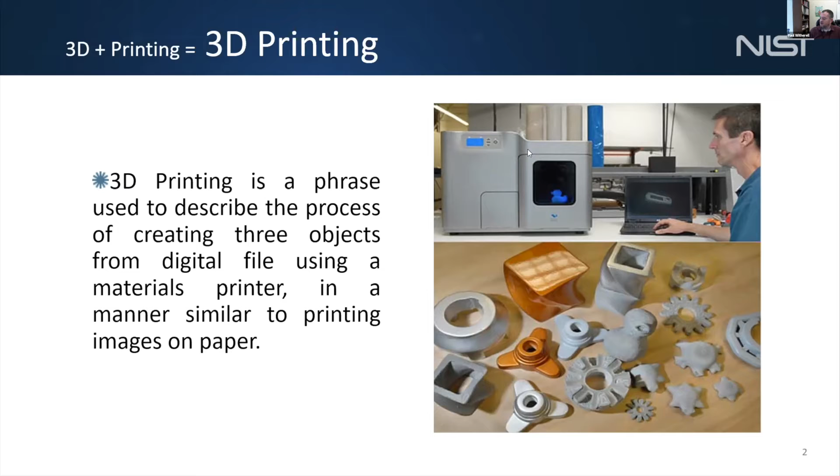So I think we've covered this far already today. Additive manufacturing and 3D printing are terms often used synonymously, referring to the same thing. I picked this slide and definition because it's a nice starting point: 3D printing is simply adding the third dimension to printing. It's a phrase used to describe the process of creating three-dimensional objects from a digital file using a materials printer, in a manner similar to printing images on paper, but with a third dimension. What you see there might be a typical at-home 3D printer in a little box, creating a polymer or plastic part. That's really the basics.

In additive manufacturing—and on the next slide we'll talk about some of the different terms used to describe these types of processes—this is maybe a more formal way of referring to 3D printing: additive manufacturing is a process of joining materials to make objects from 3D model data, usually layer upon layer, as opposed to subtractive manufacturing methodologies.

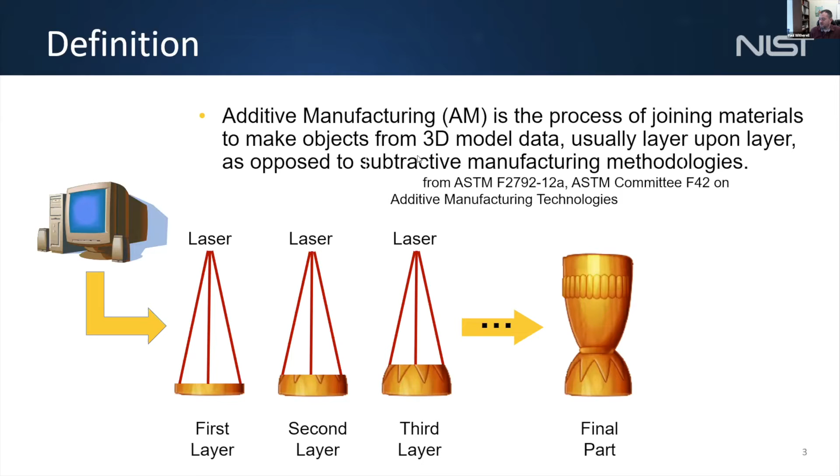Some people like to differentiate 3D printing from additive manufacturing, in the sense that additive manufacturing is more of a production process used by manufacturers to create parts for people, whereas 3D printing is often thought of as the more informal type of process. In reality, there are a lot of different names to refer to this idea of creating or manufacturing an object layer by layer. Some names people will hear are 3D printing, layered manufacturing, freeform fabrication, direct part manufacturing, rapid prototyping. These are all different iterations of the language used over the years to describe creating a part three-dimensionally using two-dimensional layers, sometimes called 2.5D.

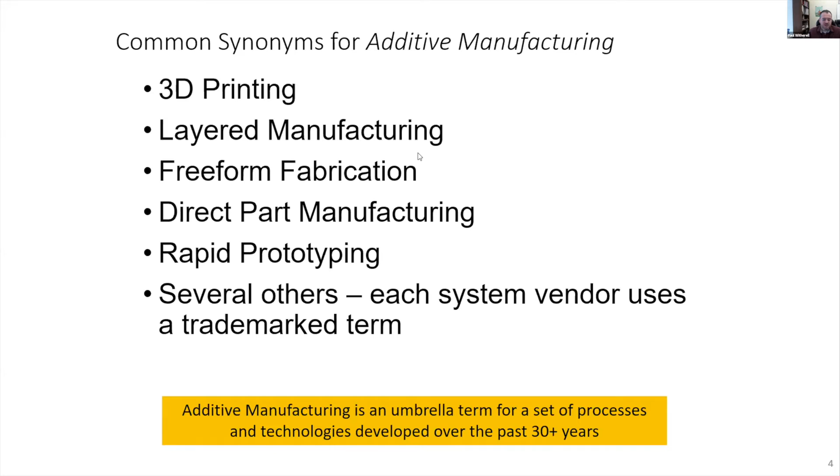The point here is additive manufacturing is an umbrella term used for a set of processes and technologies developed over the past 30-plus years. In the previous slide, the additive manufacturing definition came from a standards organization, ASTM F42 ISO TC 261. That's a standards organization I work with, and I'll talk more about it later—that's where we get some of the formalizations for what's going on with additive manufacturing and 3D printing.

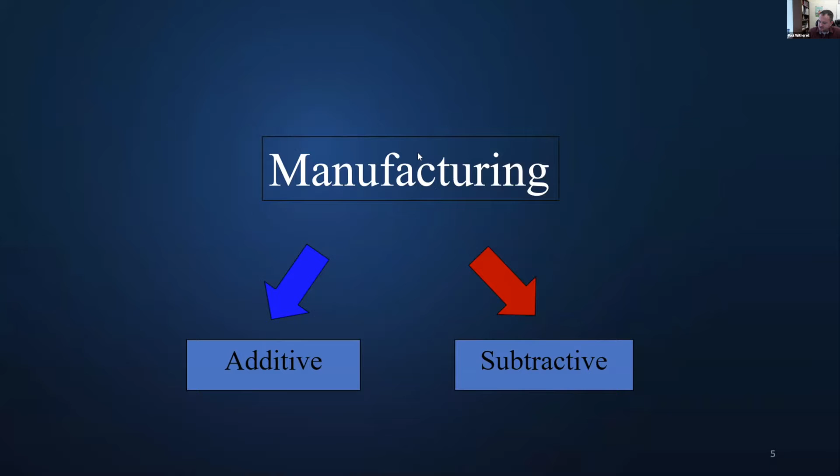In the gist of it, what makes additive manufacturing and 3D printing special compared to what's been done for a long time is very simplistic. In the next couple of slides, if you want to oversimplify manufacturing—there are a lot of different ways to differentiate additive from subtractive—consider this: if you wanted to make a sphere, a globe, the really old way is you might take a block and manually take out and remove a lot of material until you get the shape you want.

If you think of whittling something, if you're familiar with that term - the more modern way, what we see a lot with manufacturing of large metal components, is generating a 3D model, generating a CNC program, and then machining away the unwanted material. A lot of these components developed in additive manufacturing, particularly in metals, in the past have been done with subtractive machining, where you start with a block of material and remove the unwanted material until you get to the shape that you want.

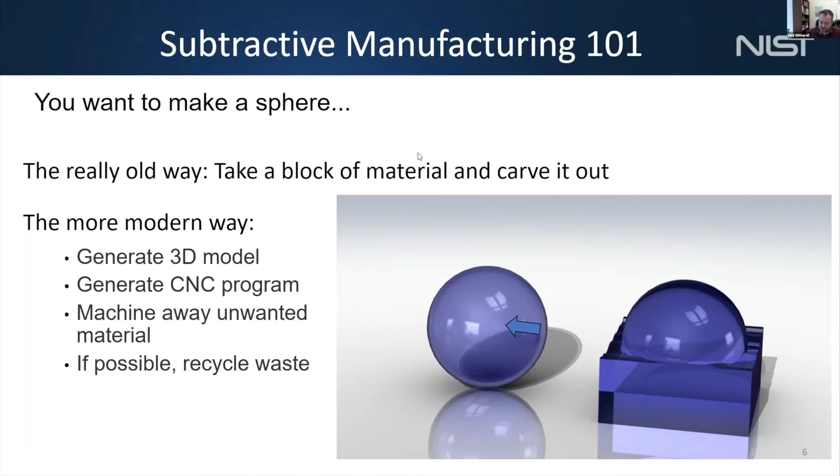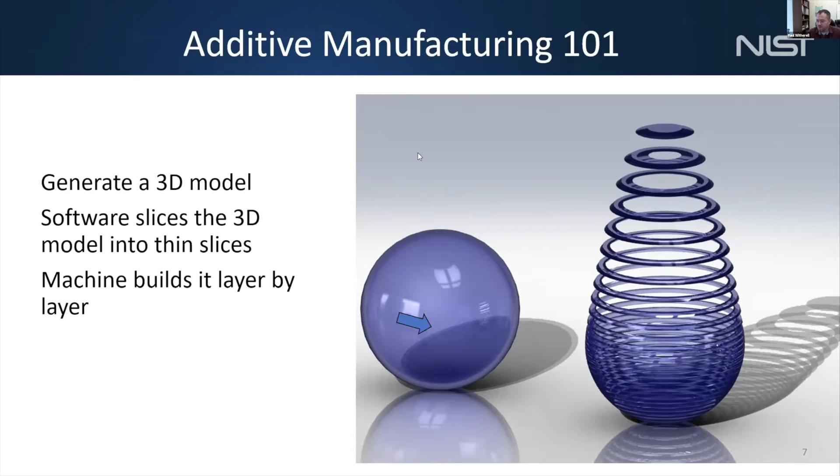As I think we know by now, additive manufacturing is different in that we generate the 3D model still, but we use software to slice the three-dimensional model into two-dimensional slices, and then we build each of those slices layer by layer. That's in essence what we're referring to when we talk about 3D printing. There's actually a lot of different ways that building can be done.

Key advantages of additive manufacturing: we can do some very complex geometries that we can't do using other processes. We can create internal passageways. We can create shell volumes that maybe you can't create using other processes. You can engineer porosity - the idea of creating cavities within full parts to perhaps do lightweighting.

Lattice structure is something that's often used in additive manufacturing, particularly when it comes to manufacturing components and developing real parts. That's the idea of creating these trusses like you see in this image, and this image. We call those lattice structures, and here's what we call a unit cell. So what you do is take this geometry and fill it in between here.

You're taking advantage of solid mechanics, taking advantage of truss structures and how they dissipate loads, and removing the unnecessary material. So what you're doing is removing material but still able to maintain most of the stiffness and really maintain a lot of the stress strain curves that you'll see from manufacturing.

Functionally graded materials - this is something that's still being explored and still being introduced. They haven't seen a lot of that in production being developed in industry at this point, but that's the idea: we can start with one type of metal and finish with another type of metal, or start with one type of volume and finish with another. One of the things we could do perhaps with the lattice is transition from a lattice to a different size lattice, and that's what we might call a functionally graded material.

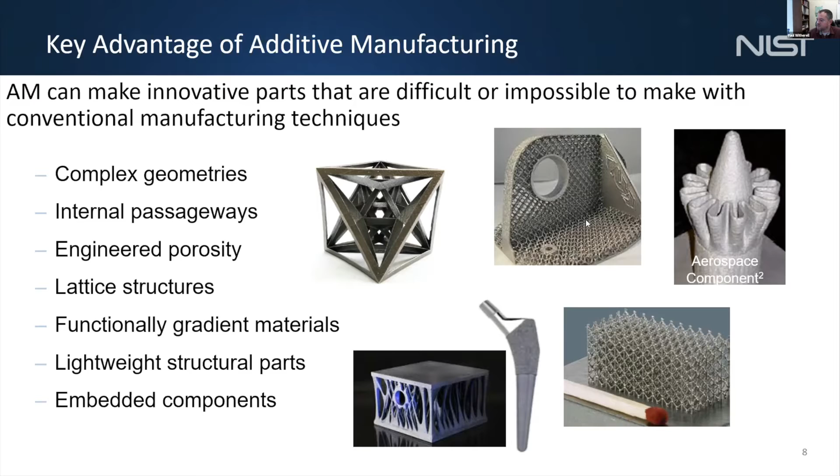So I'll talk a little bit about some of the methods that are used in additive manufacturing.

Additive manufacturing materials and processes. We've heard a little bit on the bio side of things and a little bit of the applications. Some of the methods - it's actually a broad term, as I mentioned up front, and it's increasingly becoming a broader term. Polymers, ceramics, metals, composites, papers, even cements are becoming more common, where we see additive manufacturing and 3D printing of buildings.

A variety of material forms: filaments, resins, powders, sheets, rods, and as I mentioned with cement, slurries. We're seeing more the idea of using a filament and embedding fibers into filaments, delivering either a metal or a composite type structure using a plastic or polymer, melting away the plastic or using the plastic as a binder. Each of these different materials and forms can be differentiated yet again with the types of processes that are available.

There are 7 types of processes, and within those, many different individual processes. Next we'll talk about the types of processes, but each will have different approaches. Some support different types of materials, different capabilities, and different purposes overall.

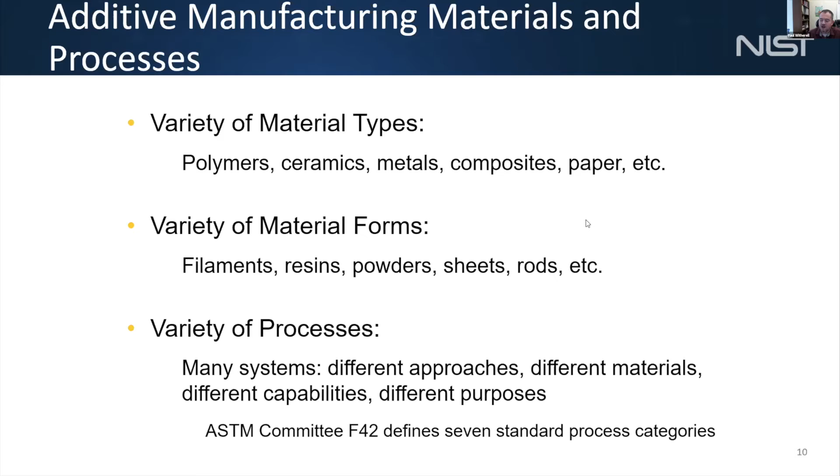I mentioned the standards committee, ASTM F42 and TC 261. One of the things we do in the standards committee is look to describe these types of processes and come to a common understanding of what additive manufacturing and these processes are. One of the things they did in F42 early on, in the past 15 years, was establish the types of processes included in additive manufacturing.

Material jetting, binder jetting, directed energy deposition, material extrusion, vat photopolymerization, sheet lamination, and powder bed fusion. And within each of these types of processes, you can actually have individual processes.

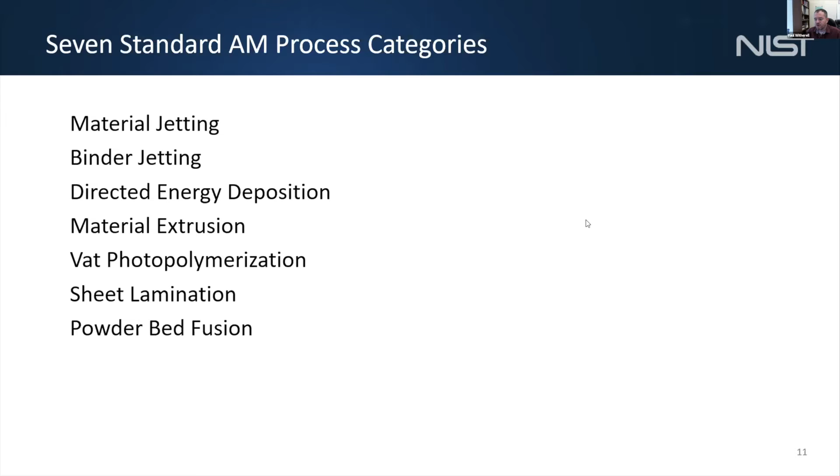For powder bed fusion, sometimes you might use a laser, sometimes an electron beam, sometimes on metal, sometimes on polymers. For vat photopolymerization, sometimes you might use a laser, sometimes a UV light ray, sometimes as a scan path, sometimes as a mask. So there are different ways of approaching these types of processes, different ways of creating the geometry.

I'm going to start with the bottom four to give you a flavor. This is where most people are familiar with additive manufacturing or 3D printing: material extrusion, often referred to as fused deposition modeling, in the context of what's done in the MakerBot. That was one of the early rapid prototyping tools, part of the Maker movement - the MakerBot was a big part of that just 5 or 6 years ago.

The idea is that it works like a glue gun, where you draw a filament and push it through a heated nozzle, then move that nozzle around within your two-dimensional area. Once you finish carving out your layer, your two-dimensional area, you move the base, and then repeat that process.

With material extrusion, sometimes you can do multi-materials - one material gives you the actual structure, and one material is used as a temporary structure that you can even wash away now with a polymer. You can also do material extrusion with carbon fibers, and with metal as well. As we advance in additive manufacturing, I'll talk more about the science in the second half - we're able to improve our processes, but also improve our capabilities.

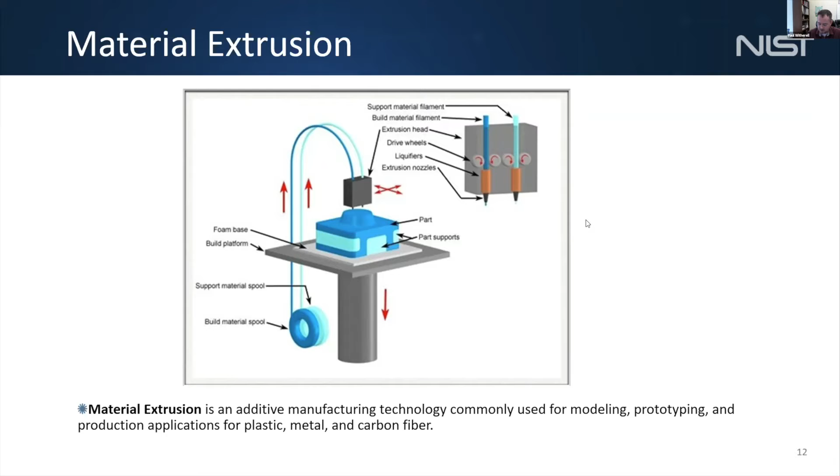Because this type uses a liquid, you'll get a bit better resolution than with something like an FDM printer or a material extrusion printer, though those printers are giving better and better resolution too. So a lot of times if you've run into something in a museum that says they 3D printed this, or you see some small shape that you realize has been 3D printed, a lot of those times it's been with vat photopolymerization. These are fairly affordable technologies or processes that give you a bit better resolution.

The material extrusion process I showed in the previous slide, that's probably what you mostly see when you talk about the maker movement and the idea of being able to 3D print at home. More often than not, those machines are used to 3D print at home, and entry level for some of those is as low as $100 or $200 now. That might require a little bit of do-it-yourself, but for a fully operational one that's commercially available, you might get one for as low as $400 or $500. So the price entry point has really come down over the years to get into additive manufacturing and 3D printing. These are two of the most common processes where people really start to learn and get engaged with the technology.

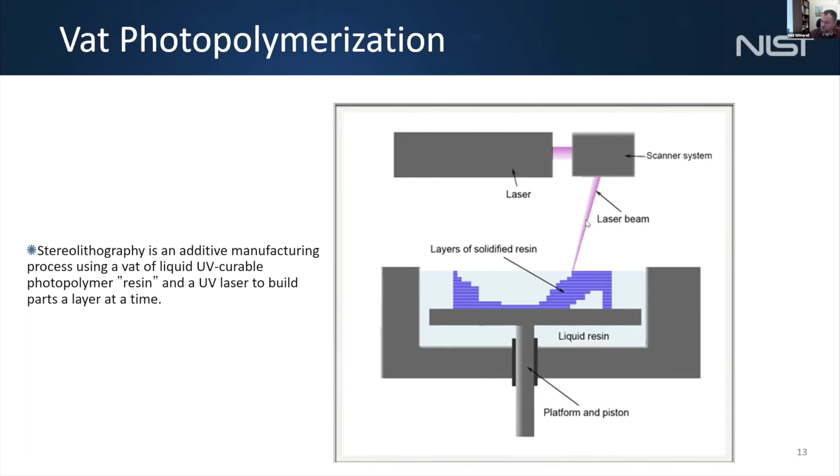Sheet lamination is a little bit different, and I want to introduce this one to give a different flavor. In sheet lamination, which is still a type of additive manufacturing, you're not moving a laser or moving filament as you draw a path. What you're doing is literally laying material down layer by layer with a sheet material, and then carving it out. You could use a laser to carve it out, but instead of depositing material, you're depositing the whole layer at once and then carving around it. So that's different - you're using the raw material process created by the sheet, and some sort of binder between the sheets to create the three-dimensional part. Whether it's adhesive coated paper, or increasingly some sort of friction welding between the sheets to bind them together, it depends on the materials involved. But that's a different flavor of the additive manufacturing processes.

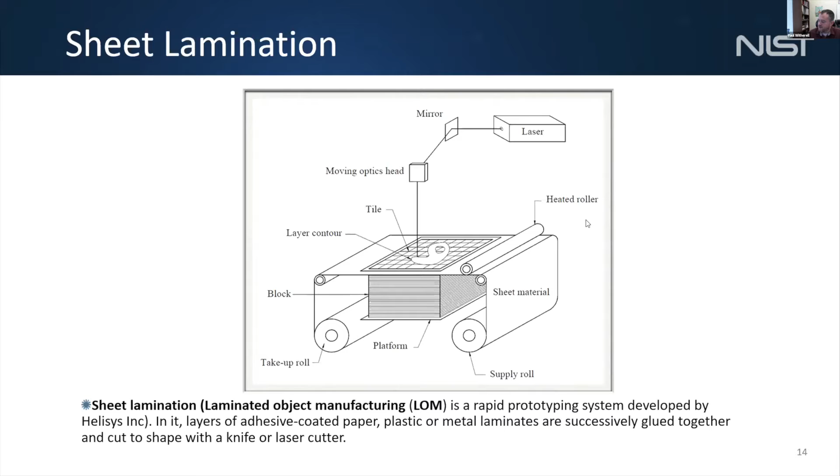And finally I want to talk about powder bed fusion. Coming from NIST, this is where I spend a lot of my time and where a lot of our work is done. I'll tell you as I move into applications what powder bed fusion really offers. But powder bed fusion is either going to be done with an electron beam or a laser. I'm most familiar with those done by laser, where the melting is done by a laser, and it can be with a polymer or a metal, and even ceramics are being explored right now.

With the polymer, what you're doing is sintering the plastic bead, which starts to create a binder, so you form your part based on the material. When you're using a metal, you're not sintering - you're fully melting the metal powder. So when we talk about powder bed fusion in additive manufacturing, particularly from my background, we bring the metal powder to a full melt, and by fully melting the metal powder with a melt pool, we're able to do the layer by layer process and create fully dense materials.

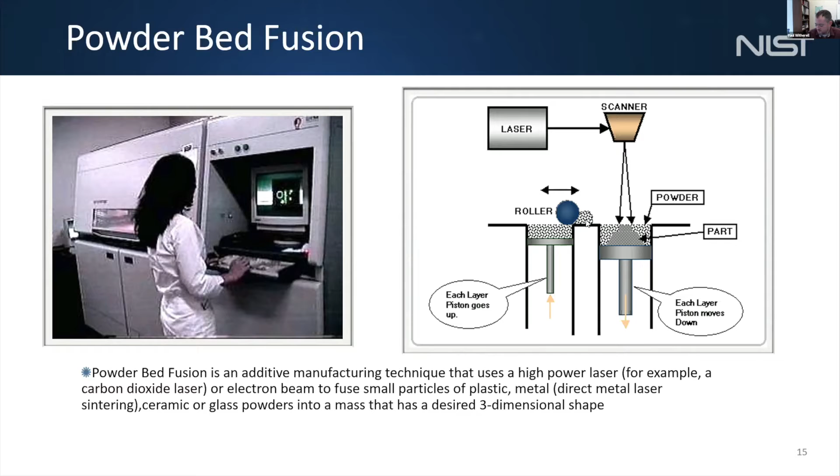So what are the projected impacts of additive manufacturing? Again, this goes somewhat into our everyday life, but very much into what we're able to do with industry and in the manufacturing industry.

Rapid product transformation - this idea of print to part is not really there yet, but art to part is something we're seeing very much of. I'll talk about the applications in the next few slides, but the idea that you can create one-offs without a lot of preparation, without having to design a new manufacturing process for it, but by simply creating a computer-generated model, you're able to create a geometry without a lot of intermediate steps.

When we're using something like a filament, and even more some of these metals processes, we're able to create geometries by really simplifying the processes that may have been used in the past.

Improved performance with reduced weight. We've talked a little bit about that with the lattice structure, the idea that we can take advantage of material characteristics, use unit cells within a part volume, and start to remove material while still maintaining an effective stiffness.

The cost-effective personalized production. For those of you who have been involved in industry for some time, or exposed to different types of industry, from mass production to more of the mass customization type thing, you can personalize things with additive manufacturing. I'll talk about that in the next couple slides when we look at the applications.

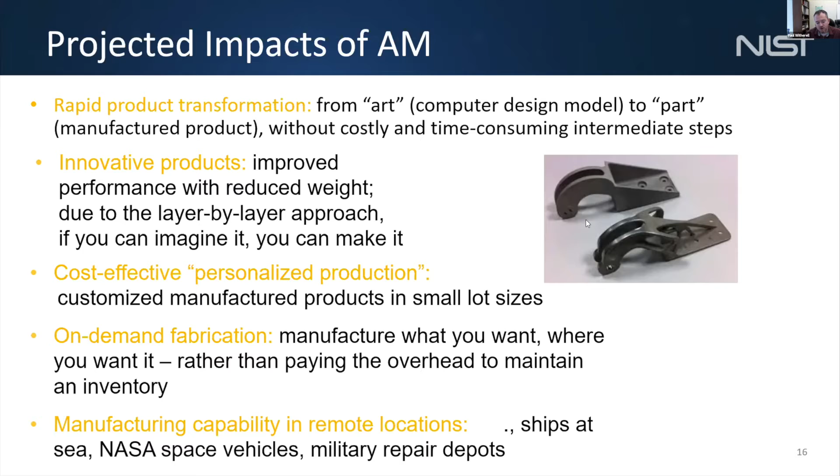And bringing manufacturing capabilities to remote locations. This is something particularly being explored by agencies like NASA and the military—the idea of not having to bring all your spare parts with you, but having the capability to recreate spare parts when you need them.

So now I'll talk a little bit about some of the applications in additive manufacturing. How is 3D printing changing the world? Medical, advances in research, prototyping, preservation, engineering, architectural engineering, advanced manufacturing, food industries, automotive, accessories. This just shows there are a lot of different places that additive manufacturing is touching. Now I'm going to go into a little bit more concrete examples of some of these.

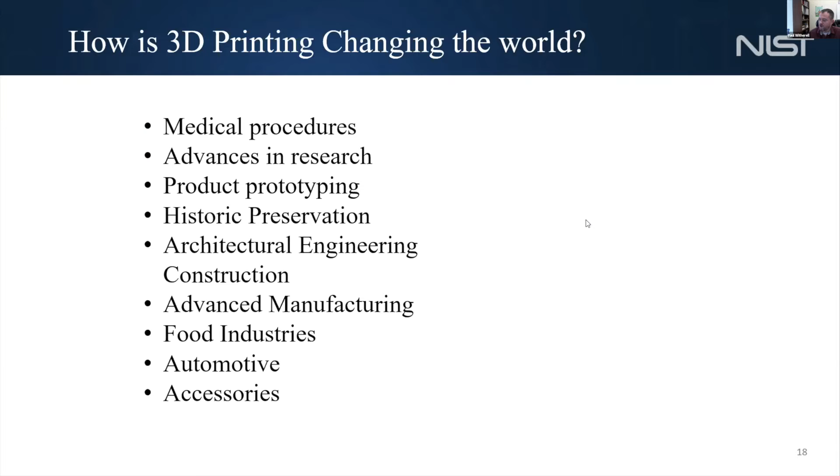I just decided to label this trinkets—a lot of stuff you might see made at home. Before COVID, when we would travel places and go somewhere with a gift shop, more and more, say you go to someplace like Paris, they'll actually sell Eiffel Towers that have been 3D printed. So you're starting to see people make these trinkets and physical objects more available to the general public.

Some little bird decorations, little action figures. Even as simple as customizing your phone case is a fairly common application.

They actually have data repositories called Thingiverse or GrabCAD, places where you can go online and grab designs that other people have done and use them yourself. There's a lot of sharing allowed by 3D printing—on Thingiverse I've printed a statue of a runner, and I'm able to customize it, maybe put it on a little platform, and create it myself at home. So this is where you might very much run into the 3D printing side of things in the everyday world.

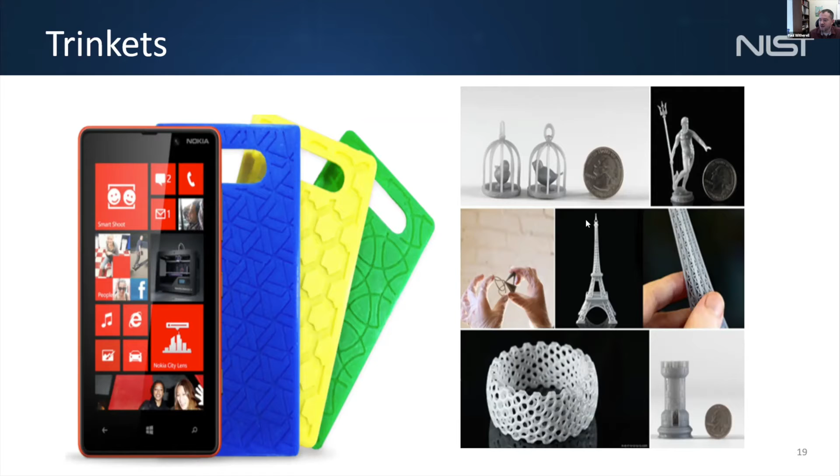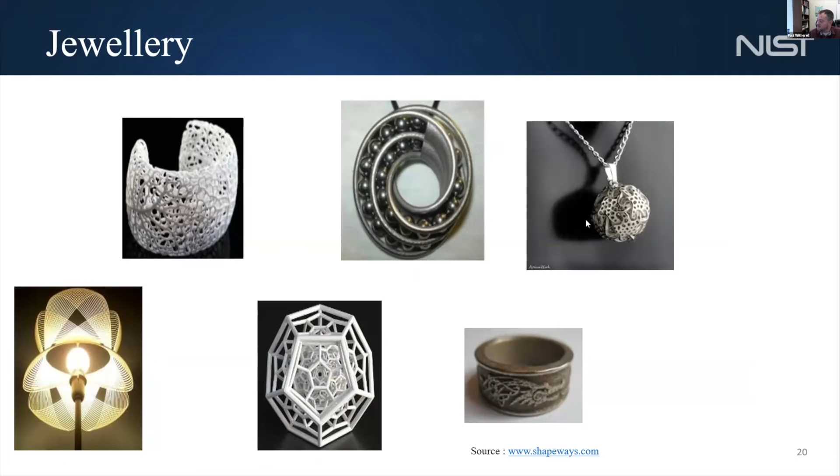Jewelry is another one that people are trying to take advantage of a little more, particularly with fancy jewelry, not just costume jewelry, but jewelry that's artistic. The idea of designing something that can only be created in certain ways is something you're starting to see more and more of in jewelry stores.

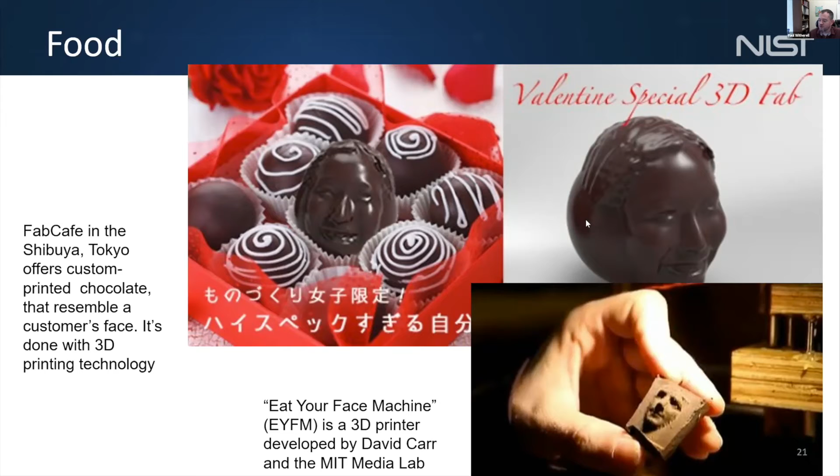Food is becoming more and more common. There was an article a couple weeks ago where someone 3D printed a steak, achieving a texture that's normally very difficult to get, but they were able to do it with 3D printing. Here's a simpler example, a chocolate, where you can eat it layer by layer. These are ways you can interact with 3D printing and some of the neat, novel capabilities being created with it.

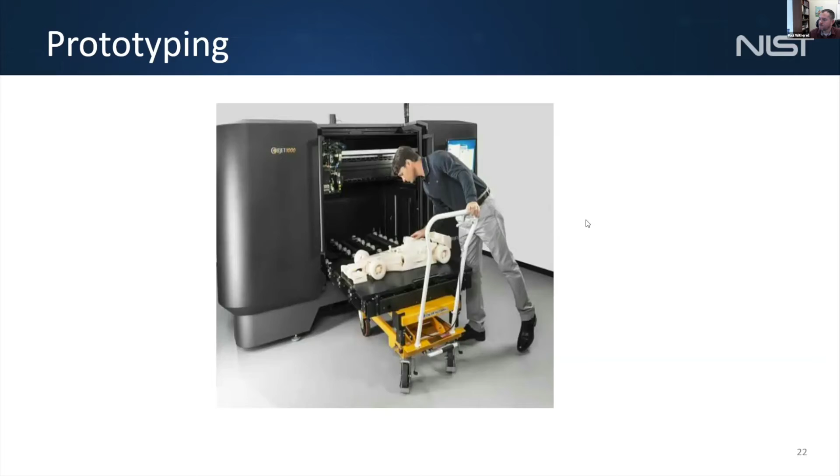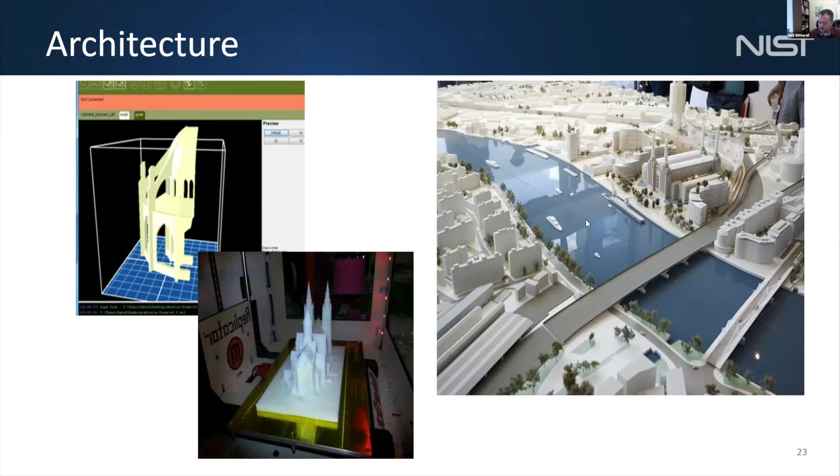We're seeing this in architecture too. We can tour homes virtually now, integrating with the 3D environment, taking virtual tours of things. But there's always still something to be said for seeing something physically. Architects have taken advantage of 3D printing technology to really realize their buildings and communities, and give people that full wow effect of what these unique designs look like when actually realized in the physical world.

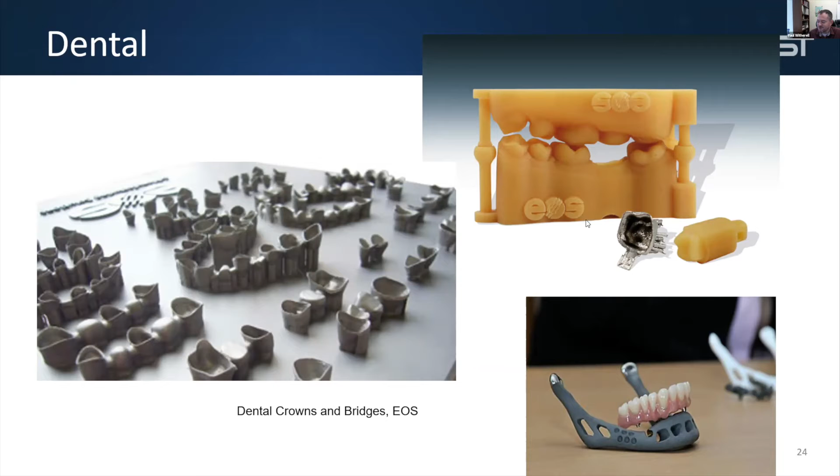Moving on from dental, bottom right has teeth but it's more of a prosthetic, or medical application. This goes to the idea of customization, being able to create parts of high quality with very specific details. You see a hip socket with that lattice structure. What's neat is that with this hip socket inserted into a patient, the lattice structure and porosity, which you wouldn't be able to create without 3D printing, actually facilitates bone growth. It improves the performance of the artificial hip socket because by exposing that porosity, it supports your bone tissue growing more naturally. Previously you'd have holes drilled into something completely solid, but by introducing this more porous structure, you actually get a higher success rate in implementation.

You see some more mechanical parts on the top right, and even hearing aids, with the idea that since every person's ears are different, why are we treating them all the same? How do you customize for a particular application and a particular person?

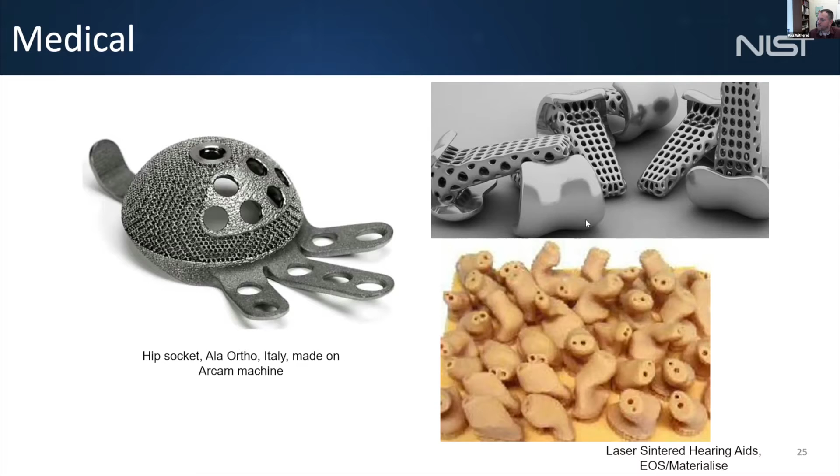Prosthetics - I mentioned I would talk about this again. We saw that jaw earlier on, the dental one, and here we're seeing the idea that every body has this particular weight balance, and so the idea of how the weight is distributed and how somebody interacts with an artificial prosthetic. Some artificial prosthetics can be very difficult to fine tune and get just right.

3D printing not only helps you iterate through those processes and find where that fit works out sooner, but it also helps you create better distributed, more advanced prosthetic technologies and parts. Here on the right is a bald eagle, and on the left you simply see a woman who got an artificial leg. Perhaps I'm not sure if her foot is 3D printed as well, but I'd imagine it is. So you're not only seeing the metal part of the leg, but the silicone that could be added, and the detail that can be added for the foot.

On the right, what you're seeing is a bald eagle, and this bald eagle is unable to survive without its full beak because it needs to eat. What 3D printing allowed, additive manufacturing allowed, was to create a fast, quick, meaningful solution that the bald eagle was able to receive - a customized beak, but also something that somebody could do on the spot. It wasn't a 2-week turnaround. It was probably a 2-day turnaround, where the beak was generated and then manufactured. This eagle was now able to eat on his own, be sent out, and live in the wild.

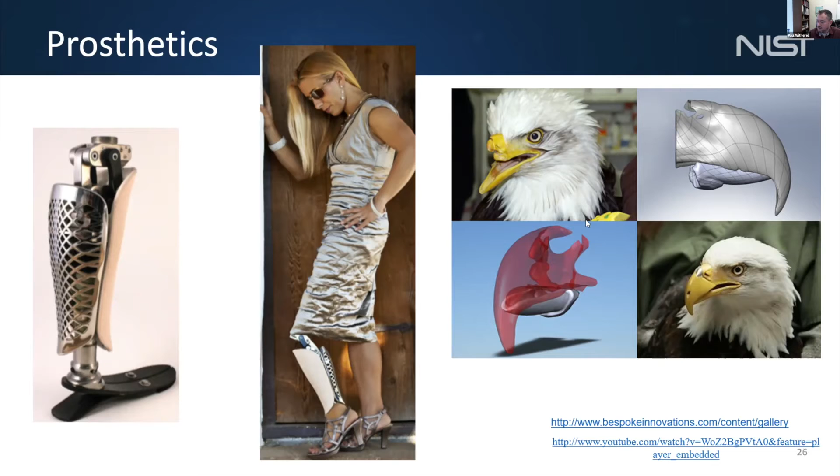And finally, for last, I saved advanced manufacturing - aerospace, automotive, and defense. This is where I'm going to live for the next few minutes, talking about what NIST does and a lot of the work we do in this area, particularly with where I'm from, in the metal side of things, in the measurement science for additive manufacturing lab. Some of the research we're doing helps the applications - the people using these applications in the aerospace, defense, and medical industries - for the advanced manufacturing of parts.

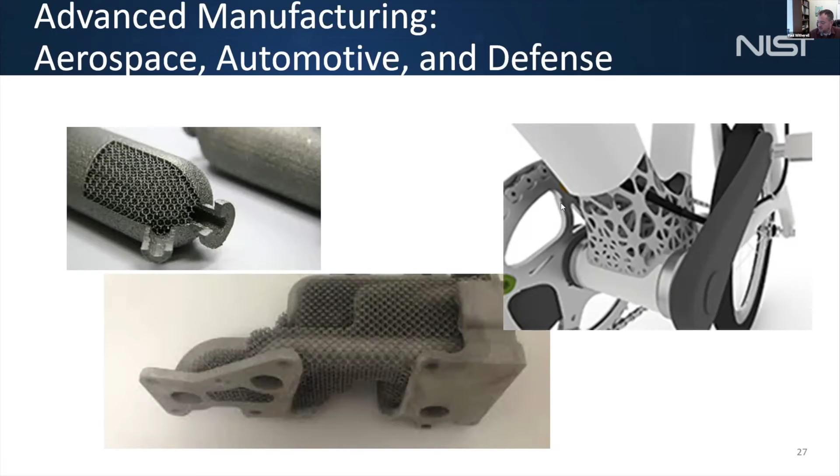So, additive manufacturing at the National Institute of Standards and Technology. NIST is a national lab under the Department of Commerce. Our mission is to support U.S. commerce through measurement science. When we talk about measurement science, we're talking about the idea that there are quantities, things that can be observed and measured. By making observations and measurements, it allows us to make better decisions and improve things. So what NIST does, what we do, is look at what can be observed, what can be measured, and how things are improved.

We actually have a very broad area of application in our research. Our main labs include the Physical Measurements Lab, which is fairly famous for operating the atomic clock - the idea that we can measure and keep track of time. We actually keep track of time for all of the US in Boulder, Colorado.

We have our Materials Measurements Lab, which has done quite a bit of work with the Materials Genome Initiative - the idea that we can break down materials into things that can be designed. We have our Communications Technology Lab, which played a large role in the transition from 4G to 5G for cell phones, and understanding the wireless spectrums and the implications of changing those frequencies.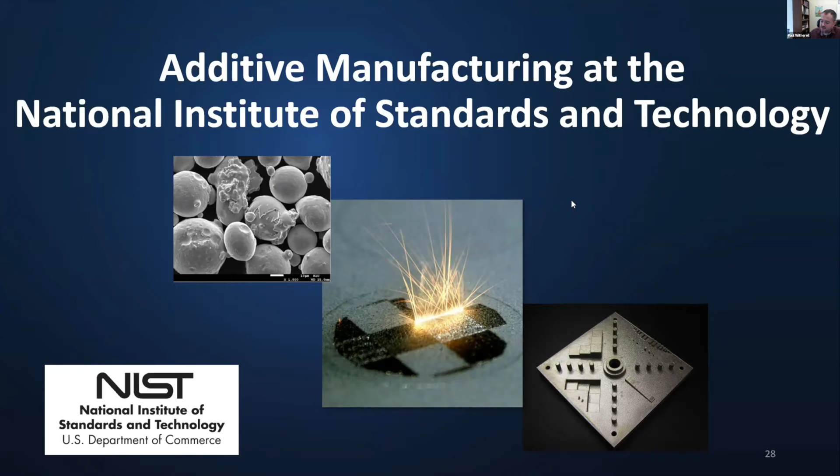Additive manufacturing at NIST is not specific to the engineering lab. We actually have it across labs, with collaborations across labs. I'm going to tell you a little bit about the polymer work done in the materials lab, and then the work we do in our measurement science for additive manufacturing program.

NIST and additive manufacturing is really a cross-lab effort. We develop the measurement science, and manufacturers and technology providers use NIST test methods, measurement tools, performance measures, and scientific data every day. We're very involved in standards development.

One of the things we do outside of measurement science is use that measurement science to come to basic understandings. I mentioned the atomic clock, but more recently we've been working on the redefinition of the kilogram—taking its definition from an actual physical quantity to something that can be reproduced using atoms and moles. NIST played a large part of that in the past couple of years.

So what are our measurement standards, our time standards? NIST really does the fundamentals that address many of those things, though not always at the fundamental science level—a lot of times we're addressing things at the applied level. That's where we see interactions with standards communities, whether it's ASTM, ASME, or the International Standards Organization, and we do a lot of standards development work and partnerships there.

Working for the Department of Commerce, we work with a lot of academic folks, a lot of government folks, and a lot of industry folks. What we really focus on is measurements and standards.

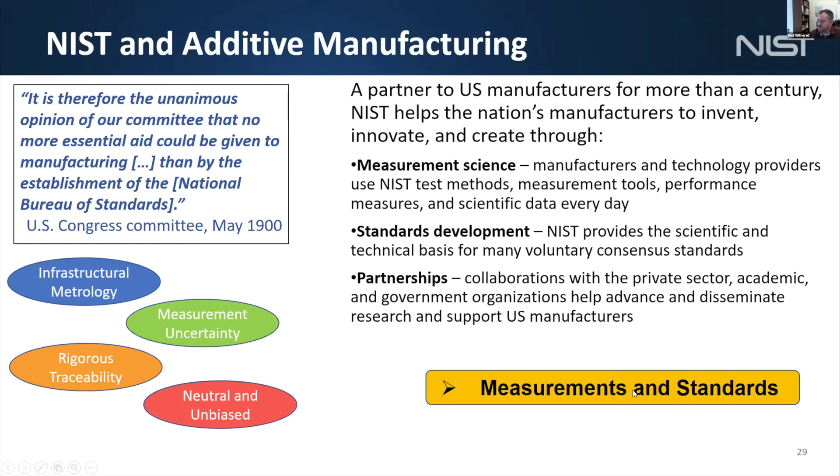So additive manufacturing with polymers—we talked a little bit about material extrusion, fused deposition modeling, and how that works. Now we'll look more into the science of how that layer-by-layer process happens. What we're seeing is a weld zone: when you deposit one layer on top of another, what is the observation we're actually making? Here you're seeing fused deposition modeling and that layer-by-layer polymer interaction.

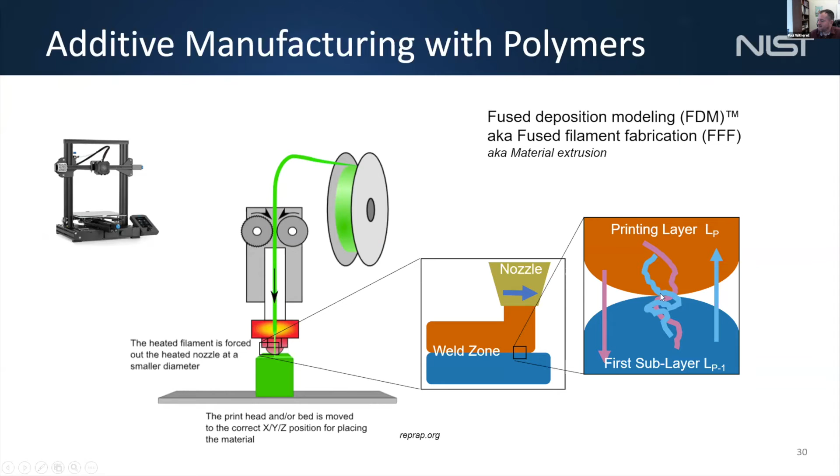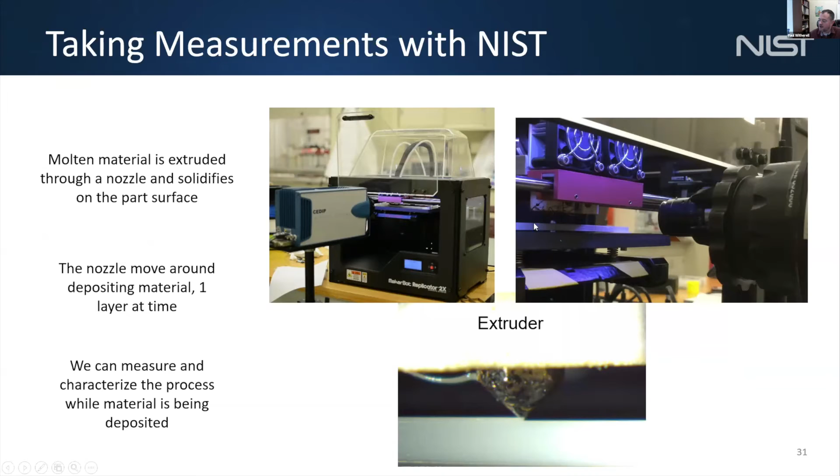Some of the work we do here at NIST, coming out of our materials measurements lab, looks at this layer-by-layer interaction by sticking a thermal camera on there to make observations about what that interaction looks like, to understand the science of what's happening. This enables us to look at the heat and temperature, analyze how the filament is being deposited, and study the interactions between layers.

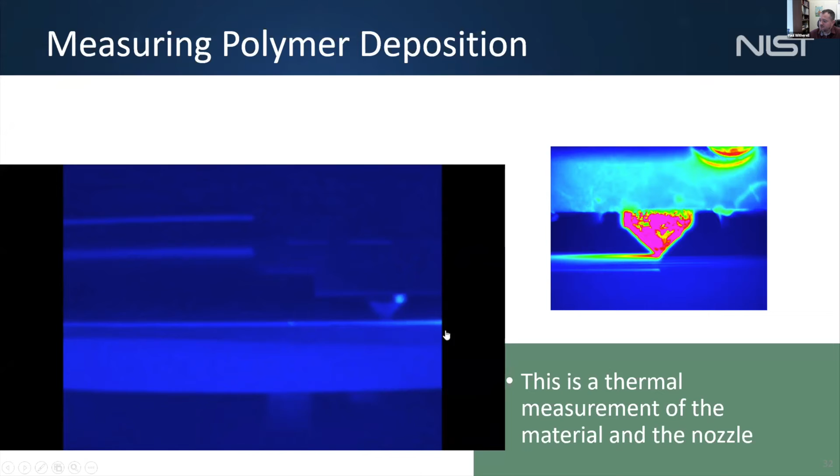Here's a snapshot, but this quick video shows thermal imaging of what's going on. You can see where it's hottest, and you can start to see the cooling patterns of the filament on a path-by-path, layer-by-layer basis. That's an example of the work our materials measurements lab has done studying polymers.

Coming from the engineering lab, our focus when we created the Measurement Science for Additive Manufacturing program was to really focus on metals additive manufacturing. That's where we've been for the past 8 years of our program, supporting U.S. industry—industries like aerospace, biomedical, dental, and automotive—that are leveraging these technologies to develop one-of-a-kind parts that couldn't be made otherwise, taking advantage of additive manufacturing for very critical applications.

Here we see a heat exchanger, a plate in the human skull, light weighting, the LEAP fuel nozzle, and a turbine blade. The idea is that additive manufacturing is being used to create parts that have been made in other ways before, but here we're seeing where it's created better, and where there was a significant part count reduction.

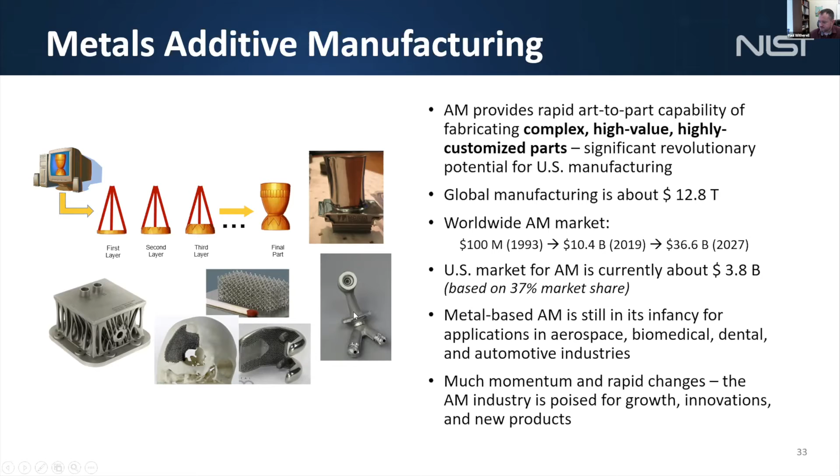We've created quite a cost savings, and here we're seeing some very unique geometry.

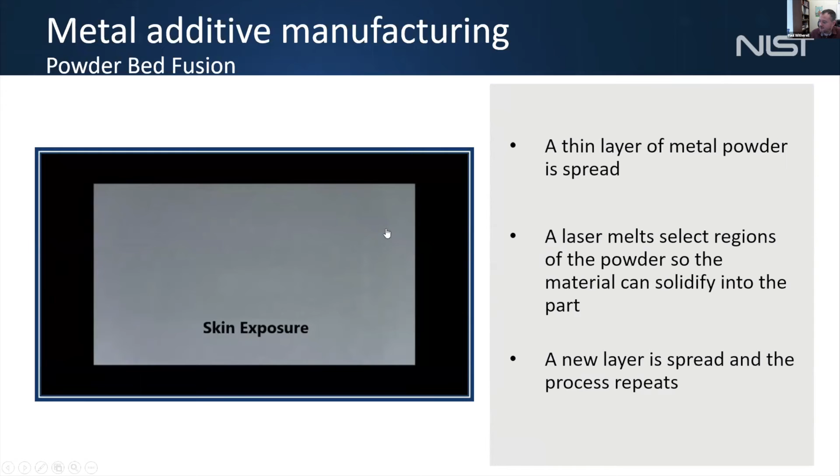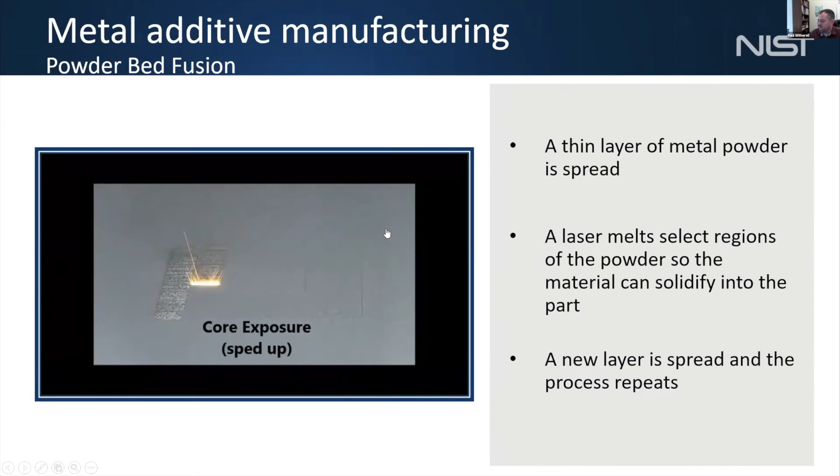I mentioned I'd show you an actual example of powder bed fusion. In our lab, we have three powder bed fusion machines for metals, all with laser, and right here we're watching the laser powder bed fusion process of metals. We also have one binder jetting machine and one directed energy deposition machine. But a lot of our work started on the powder bed fusion machine, and a lot of our work has continued there.

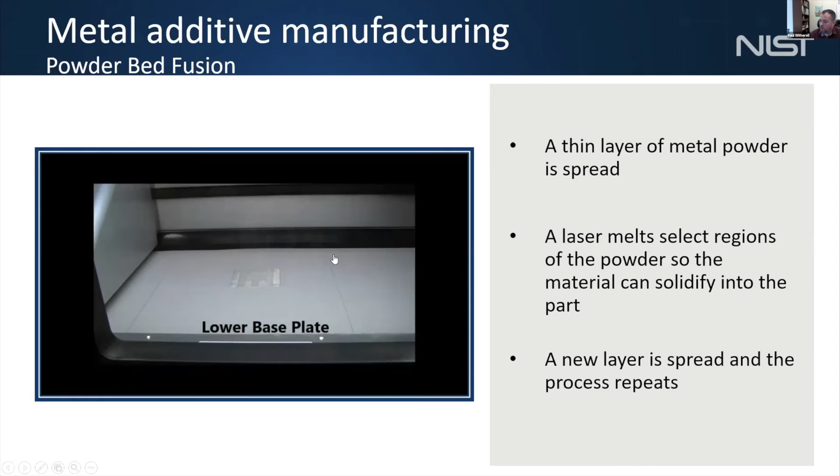So here's an example of what's actually going on in the process when we're creating something. The laser is melting it, then we see another layer of powder come across, and that process repeats.

So where does NIST come in? As I mentioned, we do measurements - we look for things we can measure so we can start to improve the process. What we found is metals additive manufacturing has been a maturing technology for almost 40 years now. I don't have the full history of additive manufacturing, but it's matured from a state where it was very sloppy to start - essentially just welding layer on layer on top of layer, to the point where you could get a rough outline of a shape or geometry, but it wasn't necessarily something you'd put in a car or an airplane.

But we are doing that now. So how do we get from something that doesn't really look like we want to something we're now putting in airplanes and cars? We're doing that by better understanding the process and its constituents, and better understanding how to evaluate the part after it's been completed and fabricated. That's where a lot of our work at NIST is focused - better understanding the raw material, characterizing and measuring it, better understanding and measuring the process, and finding new ways to measure the final part to build confidence in it. That's where most of our projects really lie.

There's actually a lot of uncertainty quantification involved. As a digital process, there's a lot of data that goes along with that as well. Dr. Lee mentioned the role of AI and machine learning techniques - a big part of how we learn from these things is we sense a lot of data, and then we analyze that data to make new observations and reach new conclusions.

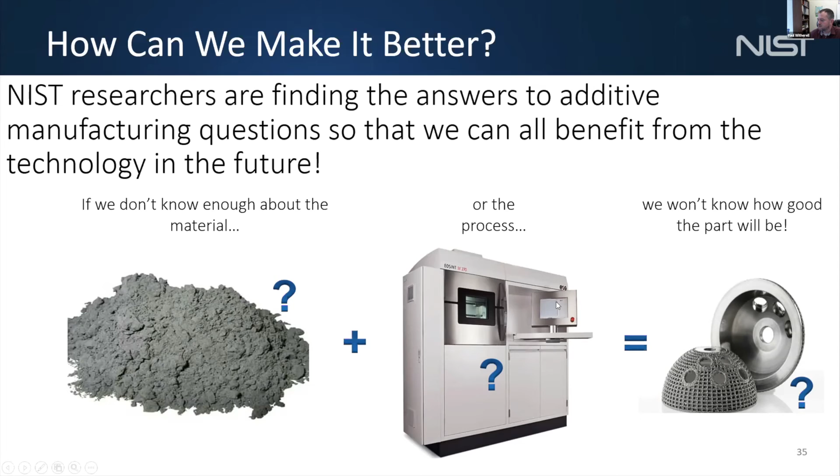So here are some of the observations we're making on the material side of things. On the left you're seeing the powder rheology, the powder flow. This helps us make observations, run simulations, and do studies of this flow, then apply it to the operating environment. We're trying to understand how to achieve a specific type of density - when using the laser to melt the powder bed, how do we distribute the powder so we get the fully dense product we want? We're able to measure the behavior of the powder, simulate it, observe and make predictions about how it will behave, and then repeat that.

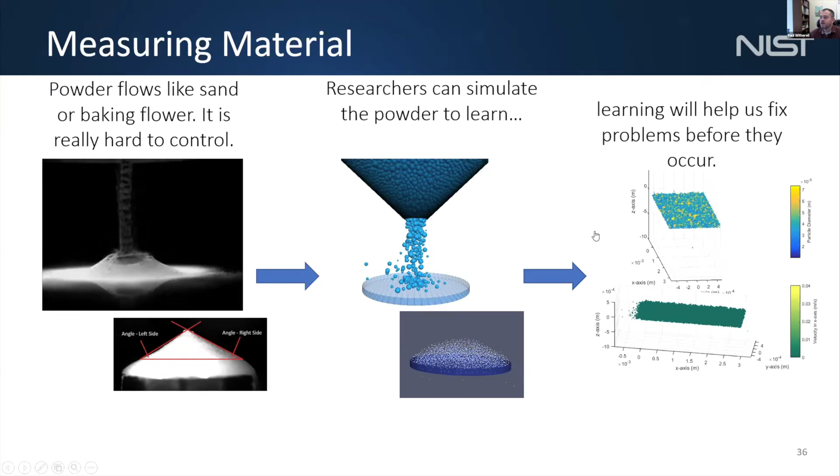Measuring the process - I mentioned that in powder bed fusion, we're using a laser going over a powder bed, solidifying a part one path at a time. This is a part fabricated in our in-house built powder bed fusion machine, which I'll show you. What you're seeing here is thermal imaging, similar to the polymer process, but this is for metals - this is a thermal imaging camera.

What it's doing right here is that's the laser tracing over this path, so this is this part being created with a laser. What you're seeing here is actually a reflection measuring the heat at the melt pools with the thermal camera.

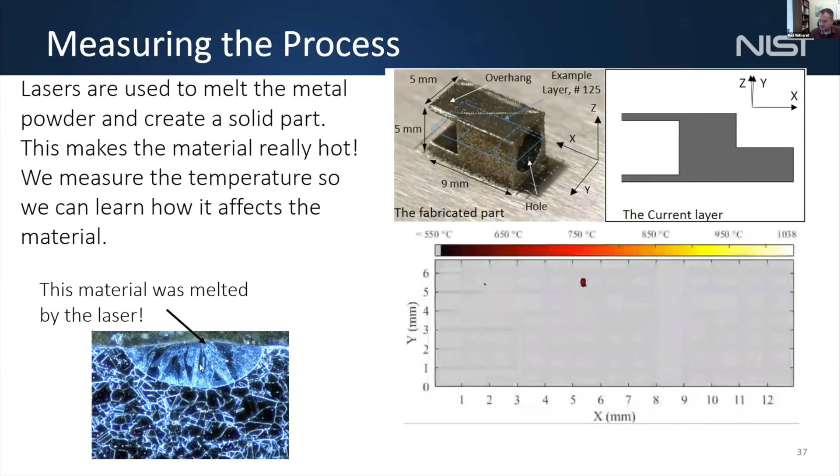You're also seeing the heat from the spattering. That spattering creates some variances in the final part quality, because that goes right back into how the powder was laid. Depending on how the laser interacts with the powder, you can create powder spattering, and that will actually change your surface finish and final part qualities. We can also look at the microstructure after the part's been melted and after it goes through different solidification phases, to see what type of microstructure forms and how it behaves, which relates to qualification.

But when we study the process, one of the things we're doing is looking at ways we can improve it. This is our in-house machine, the Additive Manufacturing Metrology Test Bed, a powder bed fusion machine that's one of a kind, built at NIST, with the key phrase being metrology test bed. It was built with the idea that we can measure, observe, and change our measurements and our measurement technology, because it's our machine.

We also have organic control over the scan strategy, which isn't normally seen in a lot of commercially available machines. Powder bed fusion is a common technology used in aerospace, medical, and defense applications. Those machines, entry level, normally cost around $600,000. Compare that to the polymer machines I mentioned earlier, which you can get for a few hundred dollars—these metal machines are very cost prohibitive.

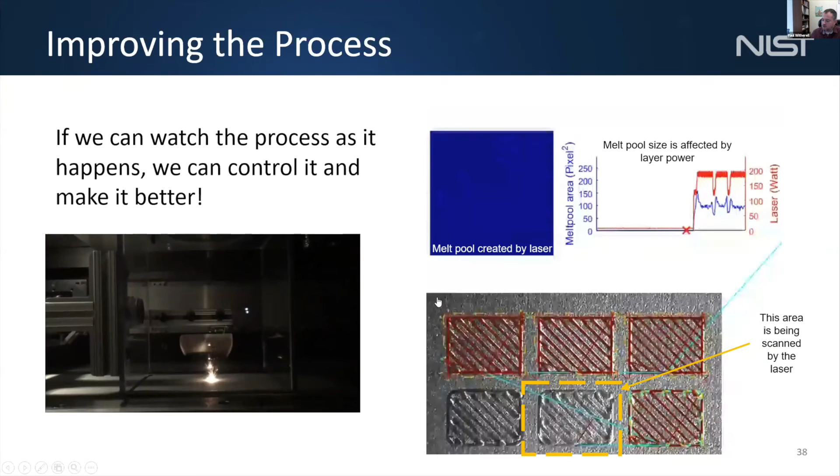When you do purchase them, it's for commercial use, and you expect good part quality out of them. Because of that, a lot of these machines work very hard to operate as they're designed, with what the manufacturer can control. But people also want to have some control themselves. So there's a natural conflict: the more the manufacturer opens up the machine, the less they can guarantee the quality of the part being created. The user ideally wants to open up part of the machine so they can have more choices and variety in how parts are developed, so it creates some conflict with these commercial machines.

By having an in-house built machine, we're able to have full control over everything going on in the machine and our entire build process. You're seeing how we're able to control the scan strategy, which is usually built into commercial machines, but in ours we have full organic control over it.

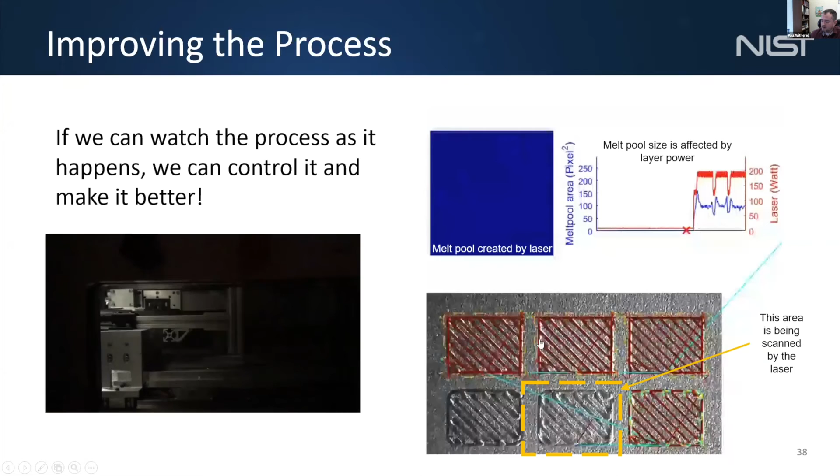Going finally into the qualification part of things—we talked about the material, about understanding and improving the process, and now, how do we know that our part is good? NIST is doing a lot of work using X-ray CT, or XCT, as well as optical surface measurements, studying the qualities of the final part. Here you'll see a 3D image of an XCT reconstruction.

This is an example of how you might have keyhole porosity—full density versus only partial density. With powder bed fusion, if you don't get a full melt, or if you move the laser too fast or heat it up too much, you might not get a fully dense part. How do you know that happened? One thing you can do is use X-ray CT, similar to what's used when getting an X-ray for a broken bone. We can use that same technology to investigate how well we're able to create our parts.

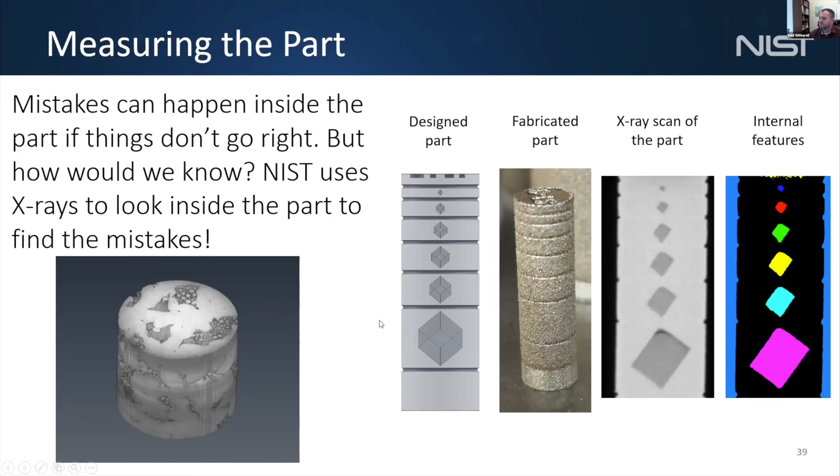So finally, I'm going to end up with, what are the facilities that we have at NIST? We have our Additive Manufacturing Research Center that you see right here.

We have our production machine, the EOS M290, which is where we create a lot of our parts that are meant to be on par with what industry sees. We have a directed energy deposition machine, our binder jetting back here, and another EOS M270 that's not in this picture. So we have our production center, if you will.

We're able to do a lot of creative parts and do a lot of our measurements. We also have a lot of measurements that are specific depending on what we're doing. Here is one of our machines that allows us to measure powder size distribution and measure the powder itself.

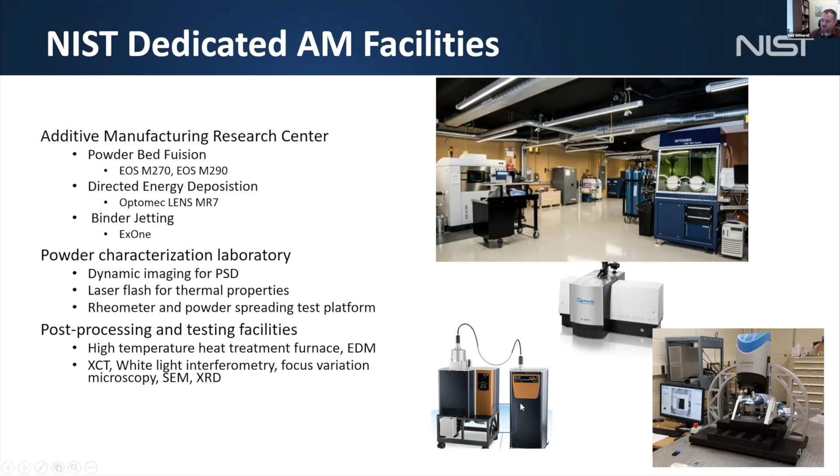This is a machine that allows us to measure the surface characteristics of the parts that are made. And this is a machine that allows us to calibrate our laser in that machine I just showed you, which is in a different lab that we have, the Additive Manufacturing Metrology Test Bed, the TEMPS laboratory.

Here we have our fully open machine that was developed in-house. We're able to control the process completely by ourselves and also set up our own measurements for the process, so we can really start to understand the process and measurement itself.

And we actually, when we set this up, we worked with our physical measurements lab to the point that we created a unique, one-of-a-kind way of measuring the true temperature of a part and the emissivity of a part. And I didn't talk much about the modeling aspects of things, but the true temperature really improves your understanding of the process itself.

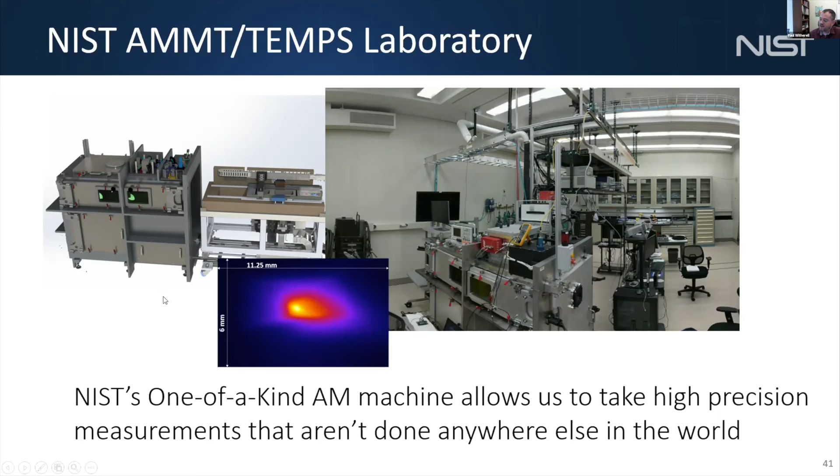People were using temperatures that were taken from different processes that weren't specific to additive manufacturing. What we did working with our physical measurements lab was develop a unique temps lab that allows us to get calibration of temperatures to something that hadn't been done before. So that was something unique that we've done here, and it really took advantage of our measurement capabilities and some of the expertise we have.

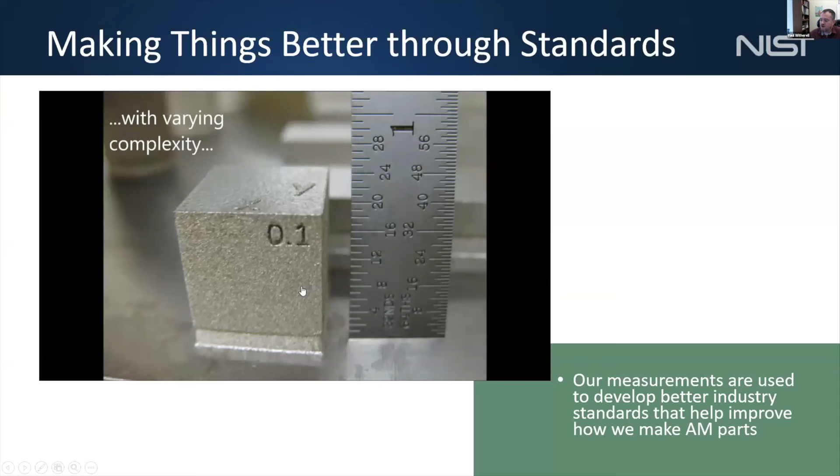And of course, the standards aspects of things. Here you'll see some witness coupons where NIST is involved in working with entities like ASME, ASTM, SAE, ISO, AWS, in developing standards that can be adopted by industry to help have a more consistent interpretation of the material, of the process, and of the final part.

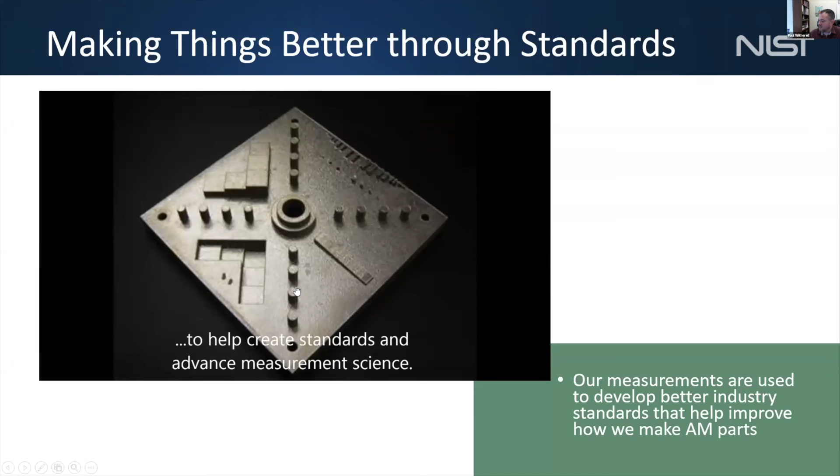Here's an example of some of our engagements: ASTM, ISO, ASME, SAE, AWS, and ANSI. And here's an example of some of the standards we've worked on with the standards test artifact, product definition, GD&T standards, and the characterization of surface texture.

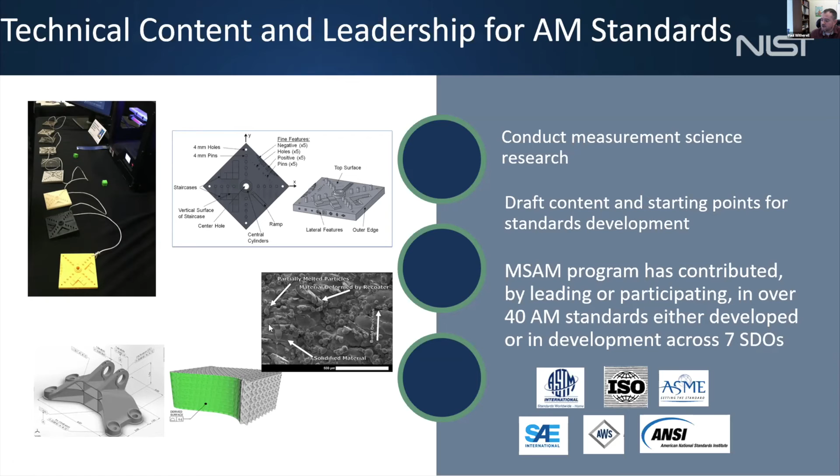If you do get involved in the future of AM standards, more likely than not, you will be involved with somebody who's very much engaged in this program here at NIST.

That's a great presentation, Paul.

Yeah, I think we can collect questions now, but before you answer a question from students, let me just add some comments and questions I have. You mentioned about a custom-made system. I read that article. Were you a part of that effort?

Somebody, your colleague? No, so that wasn't myself personally. No, that wasn't done in my project.

So in our first iteration of the program, we first created a Measurement Science for Additive Manufacturing program in 2013. We had 4 projects in that program. I led the systems integration for additive manufacturing project, which was focused on the data and data science associated with additive manufacturing. My colleagues led the materials project, the qualification project, and the process project.

And so as part of the process project, one of the things we really wanted to do was create a new platform where we could do some of those very difficult measurements that we weren't able to do with the commercial machines.